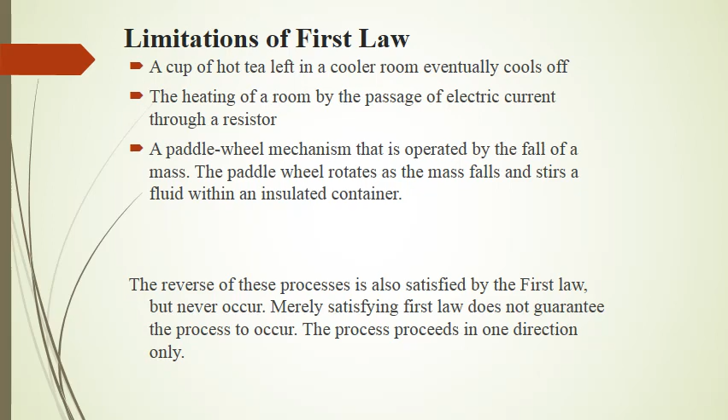So, from the arguments that we have done till now, it is clear that processes proceed in a certain direction and not in the reverse direction. The first law was placing no restriction on the direction of process, but satisfying the first law does not ensure that process or cycle will actually occur. A process or cycle will occur only if it satisfies first and second law of thermodynamics.

Now, the second law also asserts that energy has quality as well as quantity. The first law is concerned with the quantity of energy and the transformations of energy from one form to another, with no regard to its quality. Preserving the quality of energy is a major concern to engineers, and the second law provides the necessary means to determine the quality as well as the degree of degradation of energy during a process.

So you will be surprised that there is also some quality index for energy. For example, 100 kilojoule of energy at 100 degrees Celsius may sound equal to the 100 kilojoule of energy at 1000 degrees Celsius, because in both cases, whether at 100 degrees Celsius or 1000 degrees Celsius, the amount of energy we are talking about is 100 kilojoule. So they are the same in magnitude.

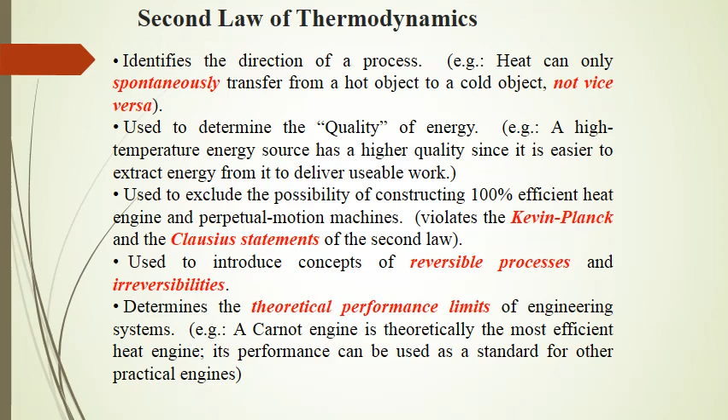Now, before we proceed further, we would like to introduce a few terms that we will be using throughout our lectures in engineering thermodynamics. One of the important terms is thermal energy reservoir, or you can say heat reservoir. So basically, a body of infinite heat capacity to which and from which heat can be transferred indefinitely without changing the temperature of the reservoir.

So basically when we are studying thermodynamics, it is convenient to consider a hypothetical body with a relatively large thermal energy capacity, meaning mass into specific heat of that body should be large, so that it can supply or absorb finite amounts of heat without undergoing any change in temperature. Such bodies are known as thermal energy reservoir or heat reservoir or reservoir.

In practice, large bodies of water such as oceans, lakes and rivers, as well as atmospheric air, can be modeled accurately as thermal energy reservoirs because of their large thermal energy storage capabilities or thermal masses. For example, many industries are dumping their heat. Many automobiles running on the roads of the different cities of the world are discharging a considerable amount of heat into the atmosphere.

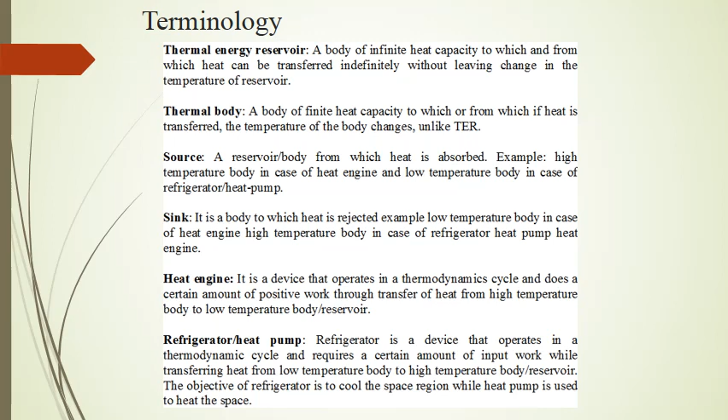Now, heat engines is the term referred to cyclic devices which produce a certain amount of positive work while heat is transferred from the high temperature body to the low temperature body. So this definition we have discussed. Now, there are several types of heat engines; though they differ considerably from one another, there are certain characteristics that are common for all heat engines.

First, they receive heat from a high temperature source, and the source could be solar energy, an oil furnace, or a nuclear reactor. Second, they convert part of this heat to work, and this work should be shaft work. Third, they reject the remaining waste heat to a low temperature sink, and the sink could be the atmosphere, rivers, etc. Fourth, they operate on a cycle.

So heat engines and other cyclic devices usually involve a working fluid to and from which heat is transferred while undergoing a cycle. This fluid is called either working fluid or working substance. So basically this working substance serves as a means of energy exchange. If heat is supplied to the system, it means heat is supplied to the working substance. If the system is losing heat, it means the working substance or working fluid is rejecting heat.

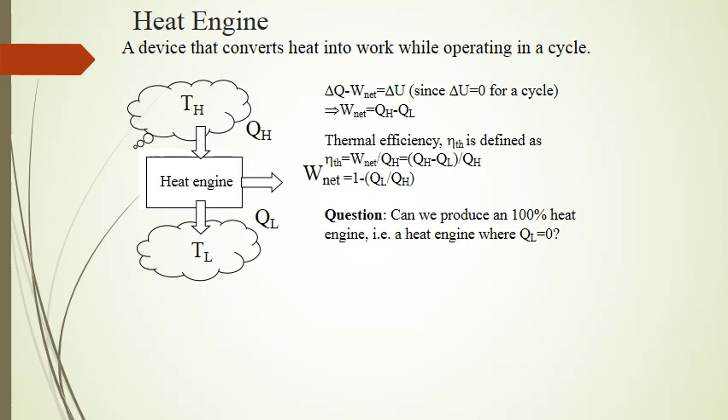And you must be recalling that for a closed system undergoing a cycle, the change in internal energy is 0, and therefore the net work output of the system is also equal to the net heat transfer to the system. As you must have studied, the cyclic integral of the heat transfer is equal to the cyclic integral of the work transfer for a control mass, for a fixed mass that is undergoing a cycle.

So here in this case, H2O is that working substance which is undergoing the cycle. A fixed mass of H2O is undergoing a cycle. So definitely Joule's statement is applicable over here. Now, how does this steam power plant that is operating on the Rankine cycle work? Basically, the working substance is H2O.

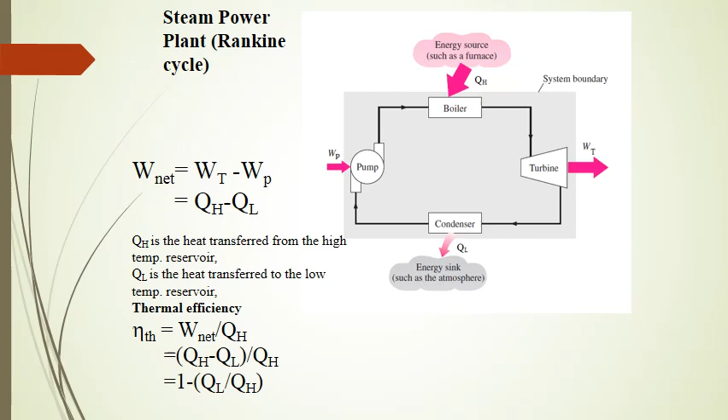We all know that heat is transferred in the direction of decreasing temperature, as we have experienced from our daily life. That is from high temperature medium to the low temperature ones. The heat transfer process occurs in nature without requiring any devices. The reverse process, however, cannot occur by itself. Means heat cannot flow from low temperature body to high temperature body spontaneously by its own.

The transfer of heat from a low temperature body to high temperature body requires some special devices called refrigerators. So refrigerators, like heat engines, are cyclic devices. The working fluid used in refrigeration cycle is called refrigerant. The most frequently used refrigeration cycle is the vapour compression refrigeration cycle, which again involves four main components: a compressor, a condenser, an expansion device, and an evaporator. We are going to show you the schematic diagram in the coming slides.

So the refrigerator and heat pumps are thermodynamically performing the same function. There is no difference between the two, except that of the objective. In both the cases, heat is flowing from low temperature body to high temperature body, and both require input. In the case of refrigerator, the objective is to cool the space, whereas in the case of heat pump, the objective is to heat up the space.

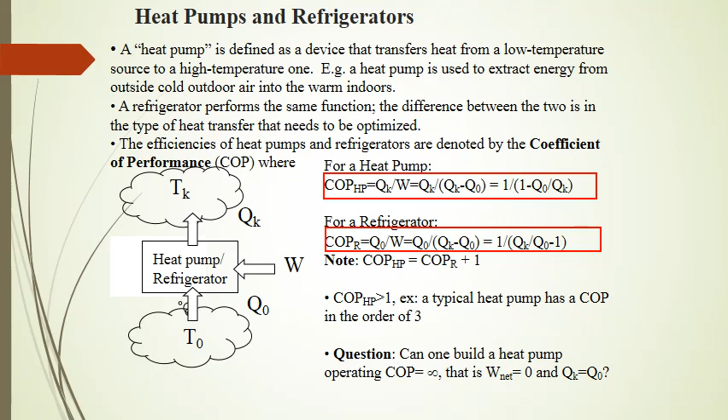You must have seen in old refrigerators a network of condenser tubes where you must have felt somewhat hot while drawing your hand near to it. So basically that was the condenser, and there were fins over it that were enhancing the heat dissipation.

Now the refrigerant coming out of the condenser enters a capillary tube where its pressure and temperature drop drastically due to the throttling effect. This low temperature refrigerant then enters the evaporator where it evaporates by absorbing heat from the refrigerated space. So basically the evaporator is nothing but the freezer coils. The freezer portion is the evaporator.

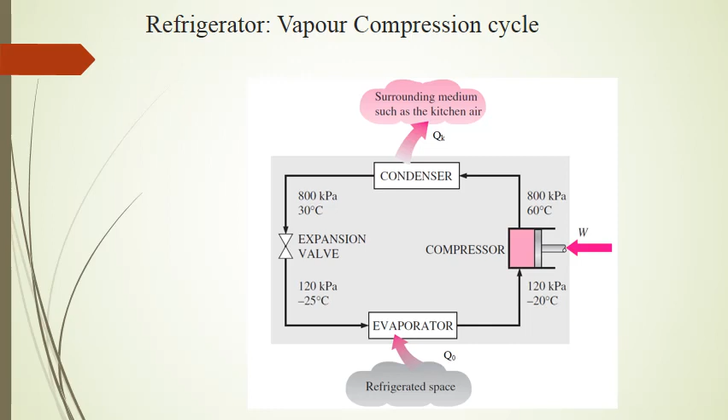Now this is the refrigerator, and the objective of the refrigerator is to remove heat Q0 from the cooled space. That is the sole objective of the refrigerator. For this heat to be taken out from the refrigerated space and dumped in the warm environment at temperature Tk, you require input of work. So the desired output is Q0, and the required input is W, which drives the compressor. So the COP for the refrigerator will be Q0 upon W, and W will be Qk minus Q0.

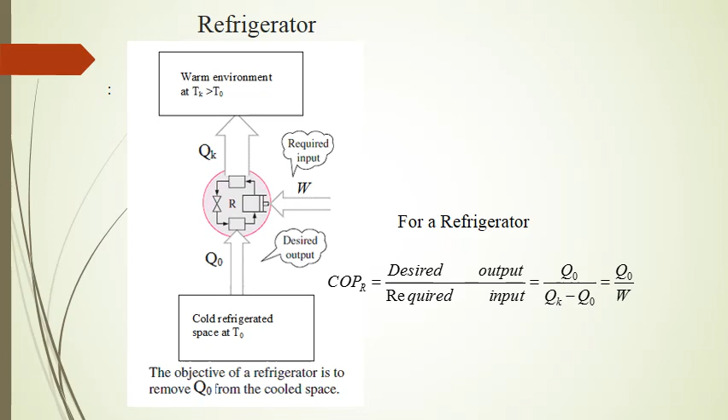Another device that transfers heat from a low temperature body to a high temperature one is the heat pump. Refrigerators and heat pumps operate on the same cycle but differ in their objectives. The objective of the refrigerator is to maintain the refrigerated space at a low temperature by removing heat from it. Discharging this heat to a high temperature medium is merely a necessary part of the operation, not the purpose.

The objective of a heat pump, however, is to maintain a heated space at a high temperature, and this is accomplished by absorbing heat from a low temperature source, such as well water or cold outside air in the winter, and supplying this heat to the high temperature body such as a house or a room.

The performance of a heat pump is also expressed in terms of coefficient of performance, and again it is the ratio of desired output to required input. So what is the desired output here? It is the amount of heat given to the space to be heated. So Qk is the desired output, and the required input is nothing but compressor work, W. So Qk upon W is the COP of the heat pump.

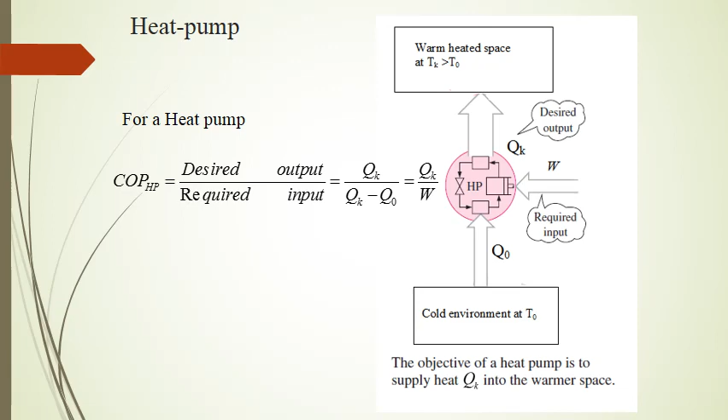Before I state the Kelvin-Planck statement, one question arises, though we have talked a bit about it earlier, but even then we can discuss it just now also. In a steam power plant, the condenser is the device where large quantities of waste heat is rejected to rivers, lakes or the atmosphere. Then the question arises, can we just not take the condenser out of the plant and save all that waste energy?

The answer to this question is unfortunately a firm no, a big no, for the simple reason that without a heat rejection process in the condenser, the cycle cannot be completed. You know that cyclic devices such as steam power plants cannot run continuously unless the cycle is completed. This energy, which we call the waste energy, which is rejected to the low temperature body or to the sink, cannot be recycled.

Thus, it is clear that every heat engine must waste some energy by transferring it to a low temperature reservoir in order to complete the cycle, even under idealized conditions. The requirement that a heat engine exchange heat with at least two reservoirs for continuous operation forms the basis of the Kelvin-Planck expression of the second law of thermodynamics. So now it is clear that basically the Kelvin-Planck statement is pertaining to the operation of heat engines.

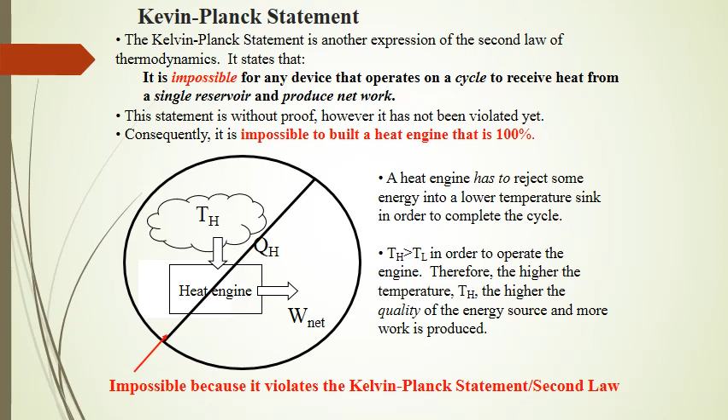Out of the two classical statements of the second law, the Kelvin-Planck statement is pertaining to heat engines, whereas the Clausius statement is related to refrigerators or heat pumps. It says that it is impossible to construct a device that operates in a thermodynamic cycle and produces no effect other than the transfer of heat from a low temperature body to a high temperature body. Means it's not possible to construct a refrigerator or a heat pump operating in a thermodynamic cycle that transfers heat from the low temperature body to the high temperature body without input of work.

Now, like the Kelvin-Planck statement, the Clausius statement is also a negative statement. Why? Because there is a word, it is not possible. Impossible means not possible. Similar is the Kelvin-Planck statement, that it is not possible. So both are negative statements, and there is no mathematical proof for either statement. They are just based on experimental observations, and no experiment has ever been conducted that violates any of these statements.

And it is for sure, if the Kelvin-Planck statement is violated, then the Clausius statement will also be violated. And if the Kelvin-Planck statement is obeyed, means it is valid, then for sure the Clausius statement is also valid. So we can infer that it is not possible to build a heat pump or refrigerator without external work input.

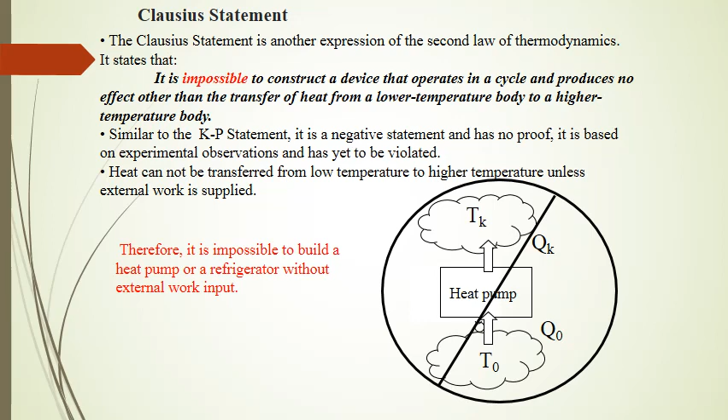The Kelvin-Planck and the Clausius statements are equivalent in their consequences, and either statement can be used as the expression of the second law of thermodynamics. Any device that violates the Kelvin-Planck statement also violates the Clausius statement, and vice versa.

Consider a heat engine refrigerator combination. So we are having basically a heat engine and also a refrigerator that are operating between the two temperature reservoirs, means hot reservoir at T1 and cold reservoir at T2. Now this heat engine is basically violating the Kelvin-Planck statement, whereas the heat pump, or you can say refrigerator, is a normal one.

Now the heat engine is having the efficiency of 100%, means whatever Q1 amount of heat has been received by the heat engine has been converted fully into work, leading to no rejection of heat to the reservoir at temperature T2. Now whatever work has been produced by the engine is supplied to the refrigerator, or you can say heat pump, means power consuming device.

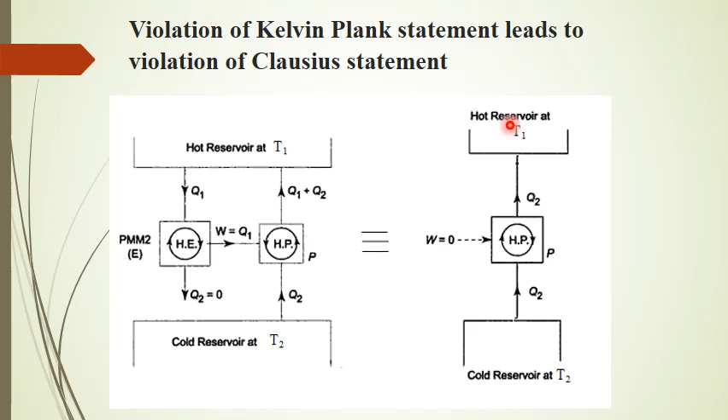Now this is another experiment that is demonstrating that violation of the Clausius statement leads to the violation of the Kelvin-Planck statement. So we are having a refrigerator heat engine combination over here operating between the same two reservoirs. The refrigerator requires no work and it is violating the Clausius statement. Let the amount of heat Q2 be transferred from the low temperature reservoir to this refrigerator, and the same amount of heat Q2 is transferred to the high temperature reservoir.

Let the amount Q1, that is greater than Q2, be transferred from the high temperature reservoir to the engine, and let the engine reject heat in the amount of Q2 as it does an amount of work equal to Q1 minus Q2. Because there is no net heat transfer to the low temperature reservoir, the low temperature reservoir, the heat engine and the refrigerator can be considered together as a device that operates in a cycle, receives heat from a single reservoir and produces a net amount of work, thus violating the Kelvin-Planck statement.

So basically what is happening over here, we are having this heat pump, or you can say refrigerator, that is violating the Clausius statement because it is requiring no input of work. Q2 amount of heat has been absorbed from the cold reservoir at temperature T2 and the same amount has been transferred to the hot reservoir at T1.

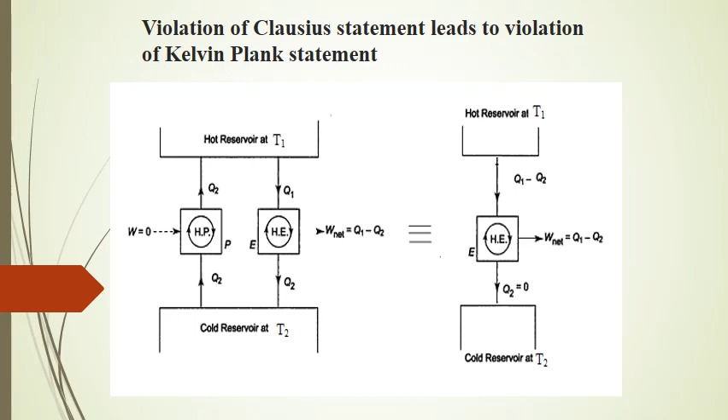So this is how we have proven the equivalence of the Kelvin-Planck statement and the Clausius statement: if one is violated, the other one is also violated. First we took the example of the violation of the Kelvin-Planck statement, which led to the violation of the Clausius statement, and then the example of a device violating the Clausius statement, which ultimately led to the violation of the Kelvin-Planck statement.

Frequently, the second law of thermodynamics has been stated as the impossibility of constructing a perpetual motion machine of the second kind. Now, basically, what is a perpetual motion machine? Three perpetual motion machines have been described. Perpetual means forever. So it means machines which are running forever, hamesha ke liye. So, what is PMM1? Perpetual motion machine of the first kind.

A fictitious machine which could continuously supply mechanical work without some other form of energy disappearing simultaneously, thus violating the first law of thermodynamics. And this is impossible. The converse of the above statement is also true. There can be no machine which could continuously consume work without some other form of energy appearing simultaneously.

Okay. So what does it say? That if any machine is continuously supplying mechanical work, it means it is being supplied some form of energy, and that energy is disappearing and mechanical work is generated. So wherever some energy is disappearing, it is appearing in some other form. The converse of this statement is also true: it is not possible that a machine is consuming work and generating no other form of energy. It's not possible.

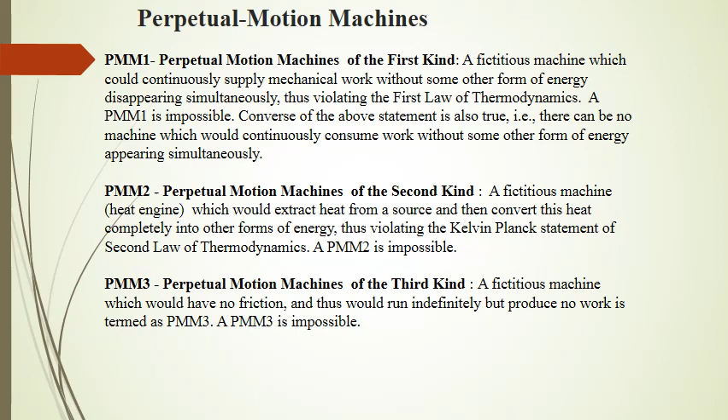That is complete conversion of a low grade of energy, that is heat, into work, and that is not possible, because if it were, we would have a machine with an efficiency of 100%. Now, the perpetual motion machine of the third kind is a fictitious machine which would have no friction and thus would run indefinitely but produce no work. That is also not possible, because every machine has some moving parts and friction is always there.

So this was all as far as the classical statements of the second law of thermodynamics and their equivalence are concerned, and also the important terminology associated with the second law, like heat engine, refrigerator, heat pump, the difference between the refrigerator and heat pump, and their performance criteria, that is efficiency and COP.